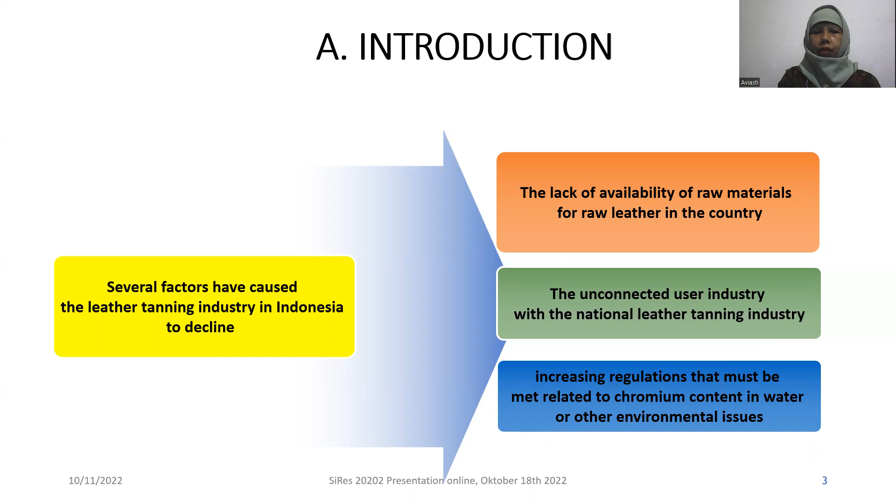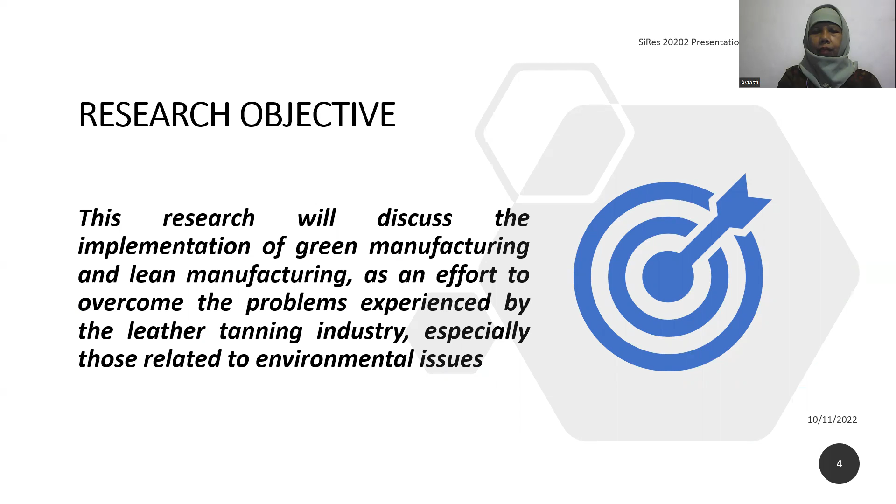Research objective. This research will discuss the implementation of green manufacturing and lean manufacturing as an effort to overcome the problems experienced by the leather tanning industry, especially those related to environmental issues. Green manufacturing is usually discussed from two perspectives.

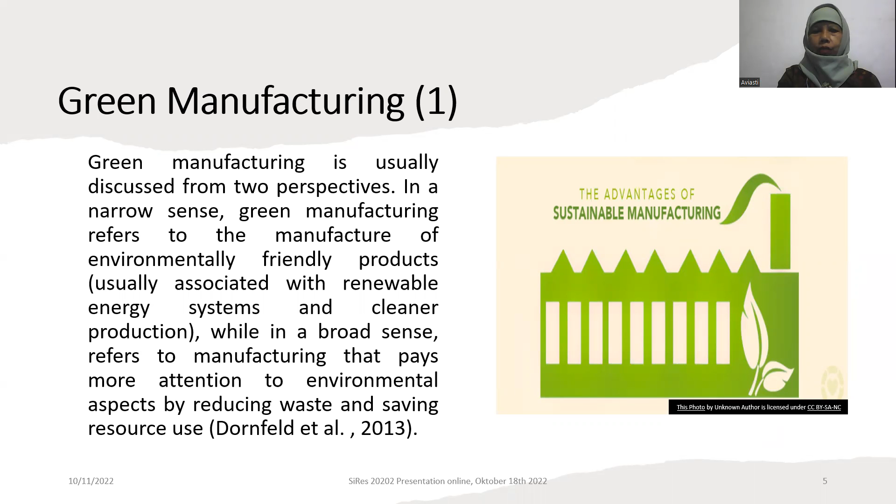In a narrow sense, green manufacturing refers to the manufacture of environmentally friendly products, usually associated with renewable energy systems and cleaner production, while in a broad sense it refers to manufacturing that pays more attention to environmental aspects by reducing waste and saving resource use. Mohanty and Deshmukh define green manufacturing practice as a collection of activities undertaken to minimize waste.

In another article, it was explained that green manufacturing is an economically driven approach, a broad and integrated system for the reduction and elimination of all waste streams starting from design, manufacture, use of raw material, and or product disposal. Atlas and Florida then add activities to reduce resource use, recycling activity, and the use of green energy.

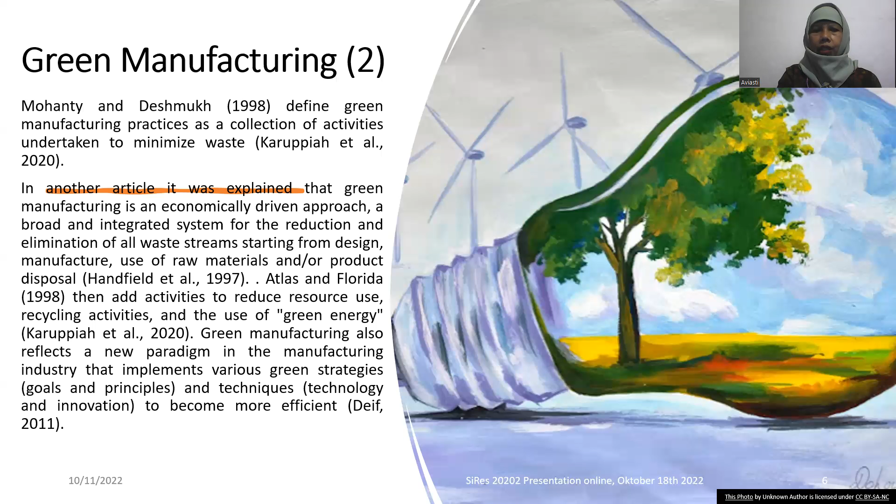Green manufacturing also reflects a new paradigm in the manufacturing industry that implements various green strategies, goals and principles, and technology and innovation to become more efficient. Lean manufacturing is one of the best practices in manufacturing that teaches simplification through waste elimination, which can be applied to very complex and non-integrated processes that are inefficient and provide little added value.

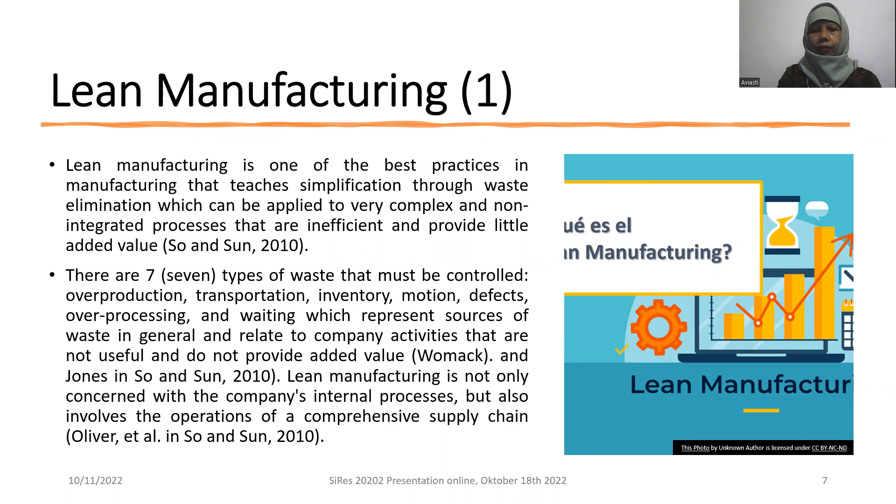There are seven types of waste that must be controlled: overproduction, transportation, inventory, motion, defect, overprocessing, and waiting, which represent sources of waste in general and relate to company activities that are not useful and don't provide added value. Lean manufacturing is not only concerned with the company's internal process but also involves the operation of a comprehensive supply chain. In a manufacturing environment where physical activity is dominant, non-value-added activities are usually more dominant.

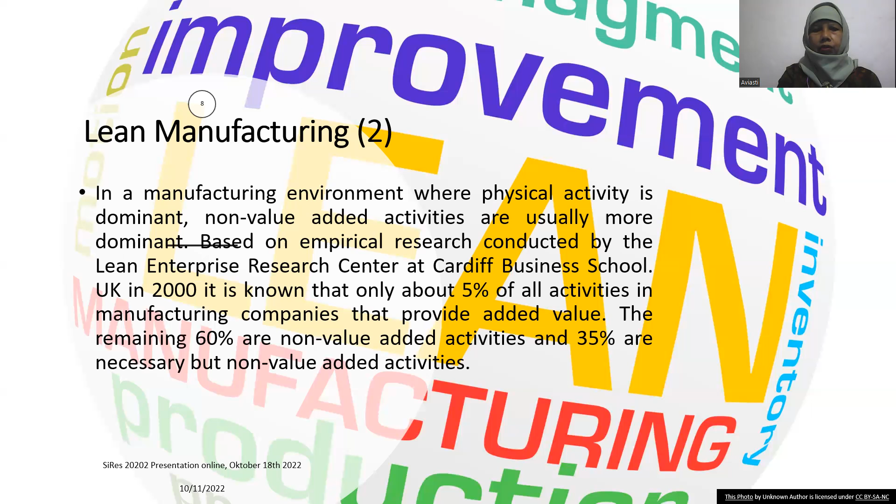Based on empirical research conducted by the Lean Enterprise Research Center at Cardiff Business School, UK in 2000, it's known that only about 5% of all activity in manufacturing companies provides added value. The remaining 60% are non-value-added activities and 35% are necessary but non-value-added activities. Green manufacturing versus lean manufacturing.

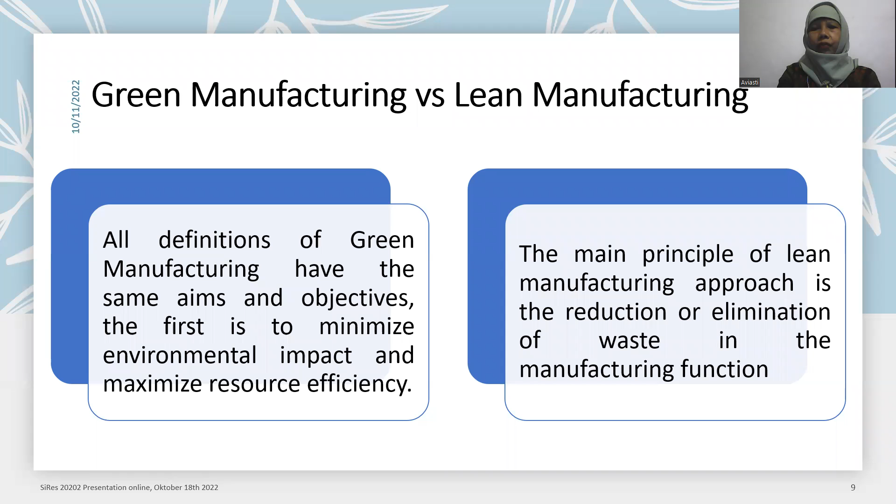All definitions of green manufacturing have the same aim and objective. The first is to minimize environmental impact and maximize resource efficiency. And the main principle of the lean manufacturing approach is the reduction or elimination of waste in the manufacturing function.

Result and discussion. The leather tanning industry is an industry that converts raw animal skins into tanned leather through four stages: beam house, tanning, retanning, and finishing. The main activity begins with the beam house process. At this stage, raw skin is processed mixed with chemicals, water, and salt. After all inputs are processed at the beam house, the output is ready to be tanned.

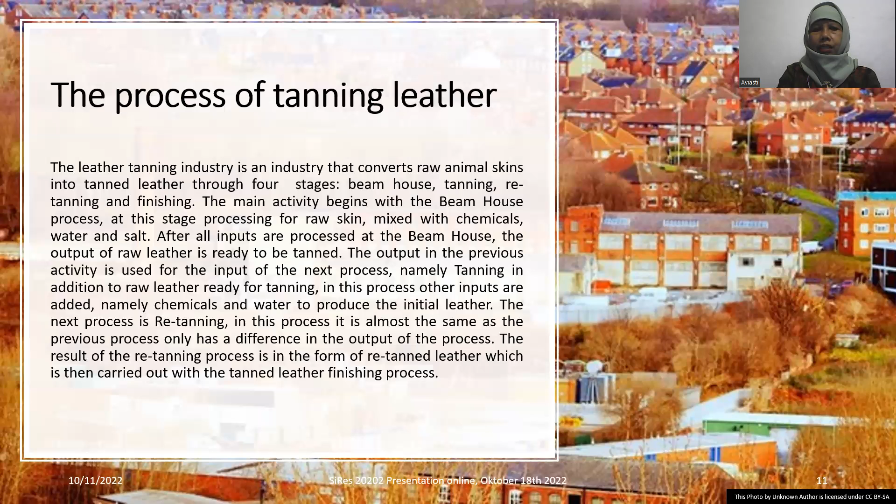The output of the previous activity is used as the input of the next process, namely tanning. In addition to raw leather ready for tanning, in this process other inputs are added, namely chemicals and water, to produce the initial leather. The next process is retanning. This process is almost the same as the previous process, only differing in the output. The result of the retanning process is retanned leather, which is then carried on to the leather finishing process.

Green manufacturing practices at the beam house stage in leather tanning are found in wet activities, because in these activities there is a lot of liquid waste. The practice is aimed at making water use more efficient and reducing the liquid waste produced. Recycling and reuse of water at every stage of tanning is possible with the aim of reducing wastewater. Countercurrent soaking and direct reuse without pretreatment of water from non-critical processes can be an option in reducing the amount of clean water used in the tanning stage.

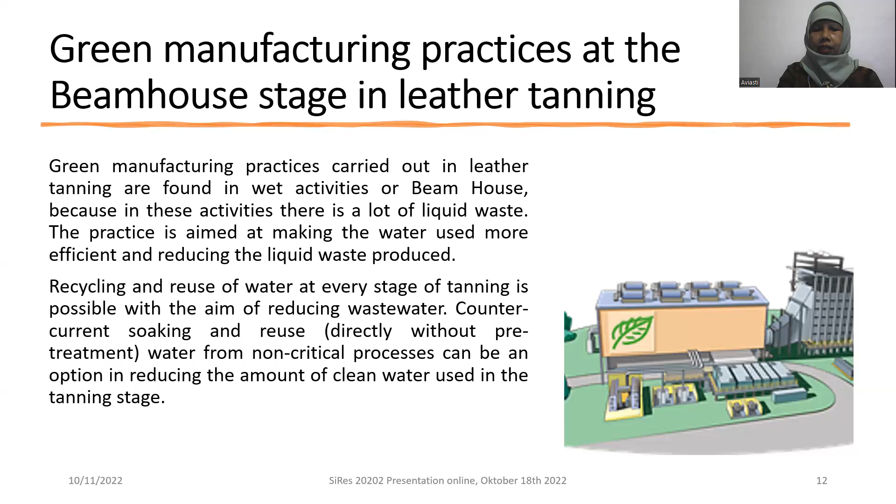The beam house process includes the liming process, fleshing process, and pickle process. To implement lean manufacturing based on identification of critical processes in leather tanning, there are several reasons that cause critical processes: first, lack of supply of leather raw material, which causes low utilization of the tanning factory so that production costs are high. Second, lack of supply of raw material also causes tanners to try to obtain raw material even though it is of mixed quality.

This causes the quality of some of the tanned leather products to also be not good. Three, the poor quality of tanned leather is also caused by the use of tanning substances that are not suitable for both quality and composition. Fourth, the delay in fulfilling orders for tanned leather is not only caused by uncertainty in the quantity and timing of supply from suppliers, but is also caused by an uncontrolled production process.

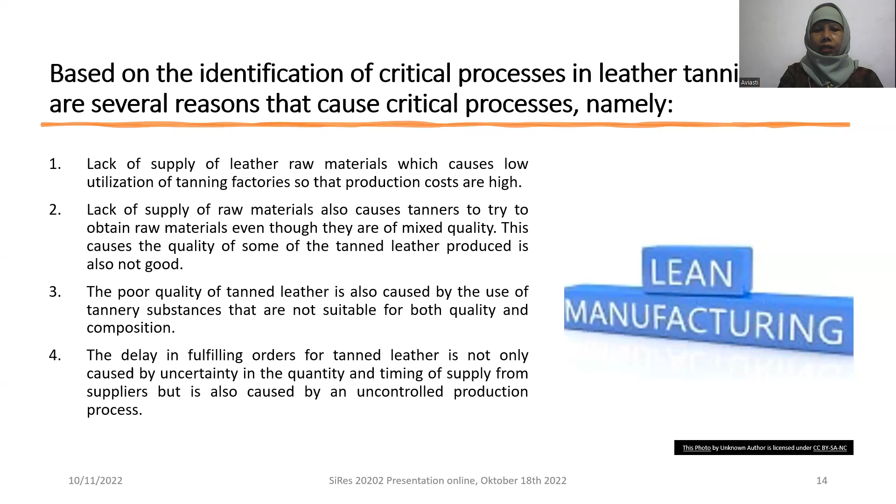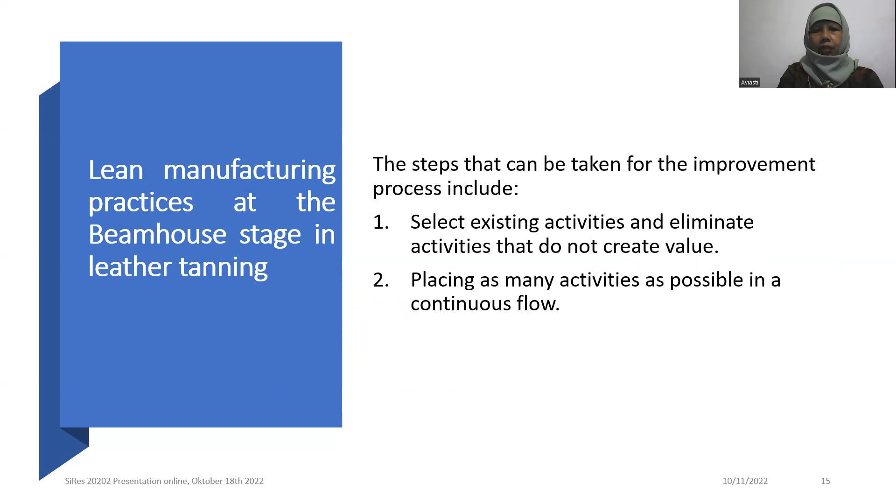Lean manufacturing practice at the beam house stage in leather tanning. The steps that can be taken for the improvement process include: first, select existing activities and eliminate activities that don't create value. Second, place as many activities as possible in continuous flow.

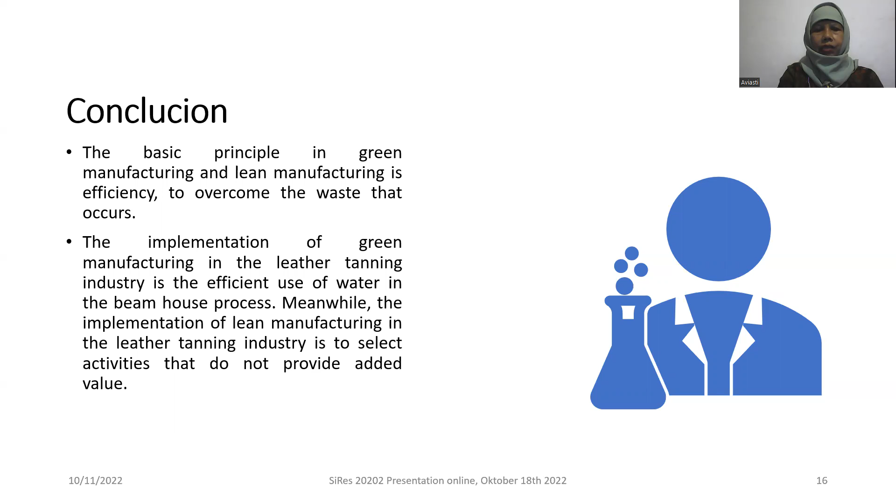Conclusion: the basic principle in green manufacturing and lean manufacturing is efficiency to overcome the waste that occurs. The implementation of green manufacturing in the leather tanning industry is the efficient use of water in the beam house process. Meanwhile, the implementation of lean manufacturing in the leather tanning industry is to select out activities that don't provide added value.